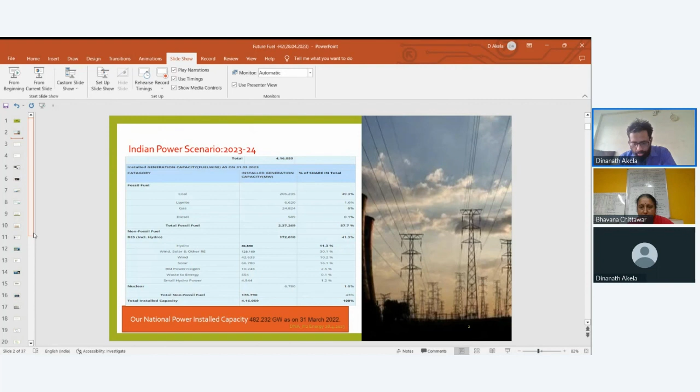So what I want to conclude is that if we look forward to the next decade, meaning 2023 to 2033, right now is the best time that renewable energies are going to take the lead.

This is the same situation as when I compare to 2009, when I was in engineering college and solar had just taken birth. At that time many industries and stakeholders were saying it's not going to be an alternate solution to thermal, because the unit cost of solar was 13 rupees plus. But now, after just 10 to 12 years, solar is very much competitive with coal.

This is in consideration of pricing, but in some other factors the cost of coal also goes high. In the same way, right now we are in the phase where hydrogen is just starting to take birth.

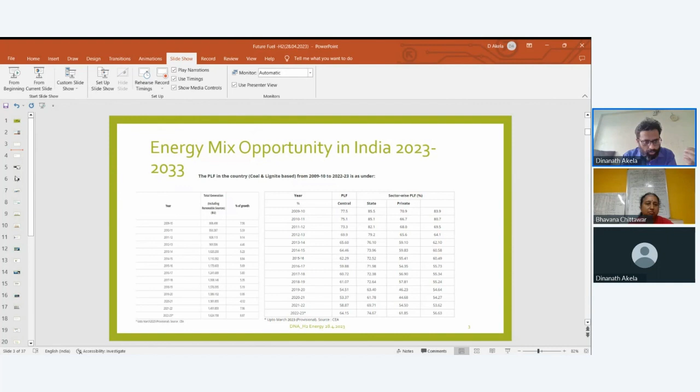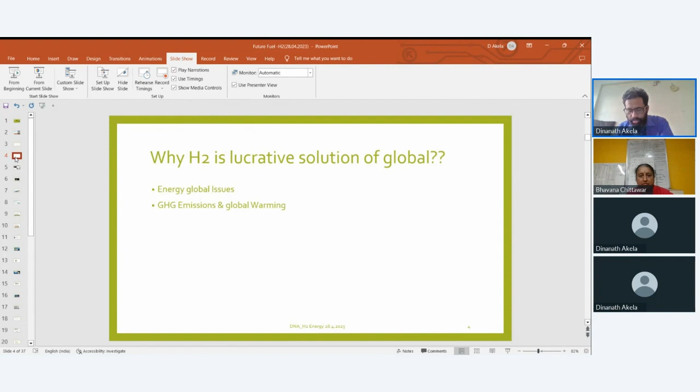This is the right time where many industries are giving more and more emphasis on R&D. They are setting up their own labs, facilitating things, investing, and coming up with great solutions. Let me share one or two examples in this regard.

First, I would like to tell you about Reliance. Their respected MD Mukesh sir has talked about a target called 1-1-1, which is very interesting: 1 kg of hydrogen would cost $1 within 1 decade. That is the target he has put forward.

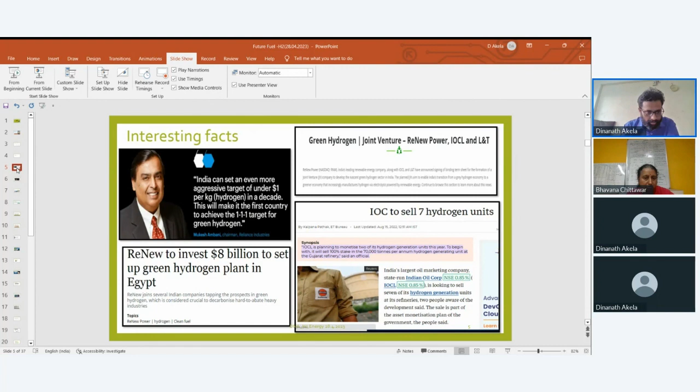Apart from that, other ventures like ReNew Power and IOCL are also going to make great investments in the field of hydrogen energy. We also have an update that Germany has started some hydrogen fuel train trials. I want to share a small video with you showing how our country is moving in the direction of Atmanirbhar Bharat.

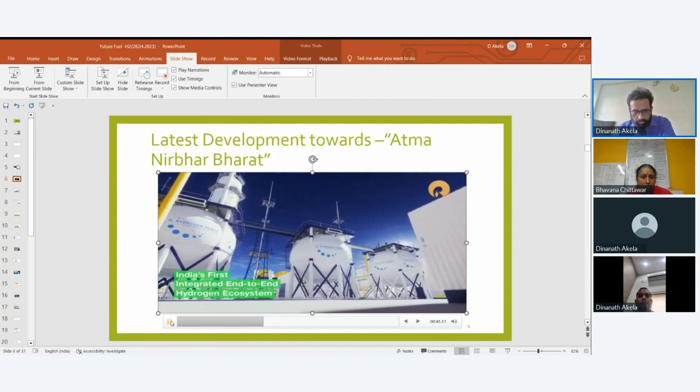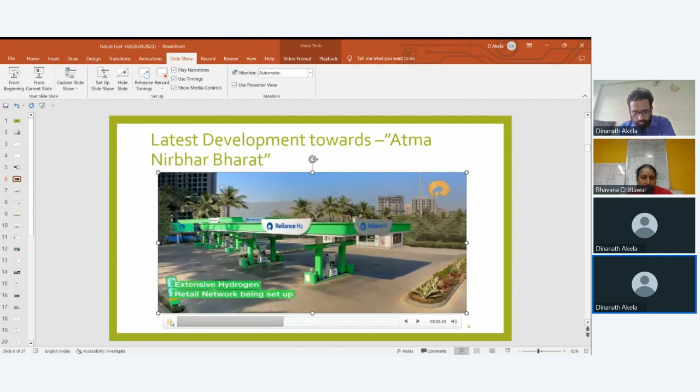Is there sound with this file? Yeah, is there sound with this file? Because we are not able to hear anything.

Apart from Reliance, some others just right now this week, Tata has also started a very big assessment of hydrogen gas firing in the blast furnace in Jamshedpur. So this is the right time that many industries are going to lead in the perspective of how they are producing, and they are going to change the technology in their periphery, in their system.

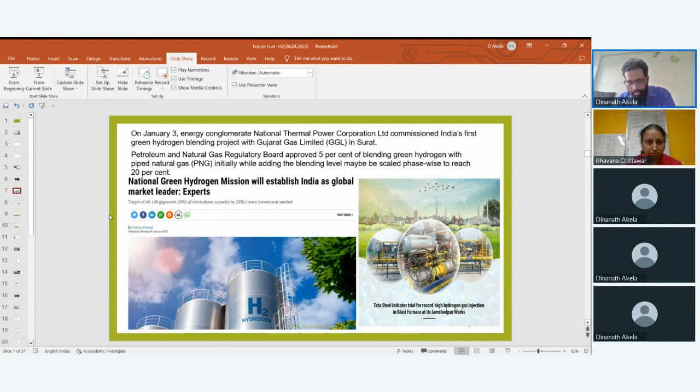Some more examples just right now I'm going to share: Gujarat Gas Limited in Surat, they are right now doing the blending of hydrogen with natural gases. So this is the right time, and we are hoping that definitely our country will lead in this platform.

But it is not easy. There are so many challenges right now we have to face, the technology development, and some factors I'm going to share from now onwards about how this firing technology is going to be built up, as we talk about the system of the furnace, as we talk about the system of the boiler. So each thing I'm just going to explain in detail.

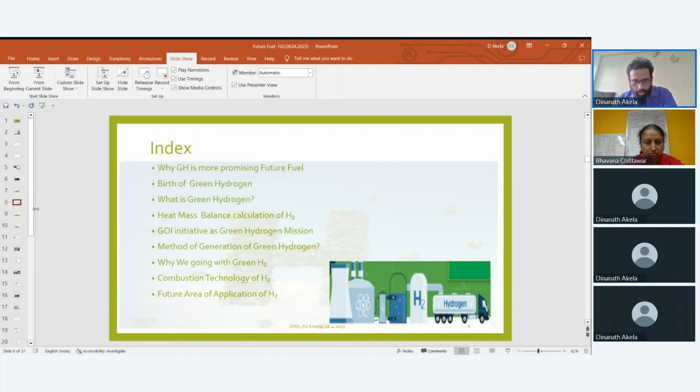First of all, I will give you the characteristics of hydrogen. It has a huge GCV value, like 28,922 kilocalorie per kg. If we compare with natural gas, then clearly we are getting more than 2.5 times.

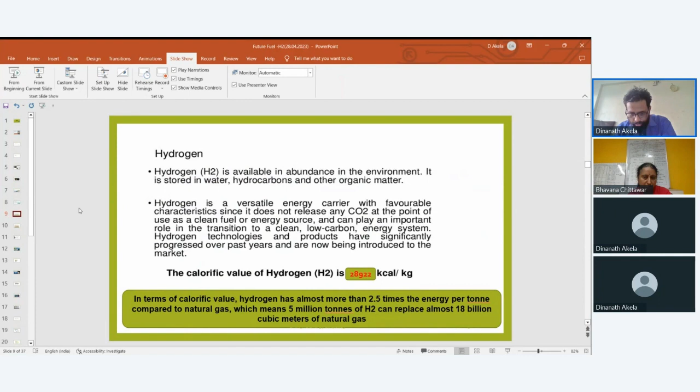Apart from that, some other factors I would like to show you: if we are just burning carbon, 1 kg of carbon gives a heat value of 8,084 kilocalorie. In the same way, if I burn hydrogen, it gives almost more than 2.5 times. So in this way, this is the comparison based on heat value.

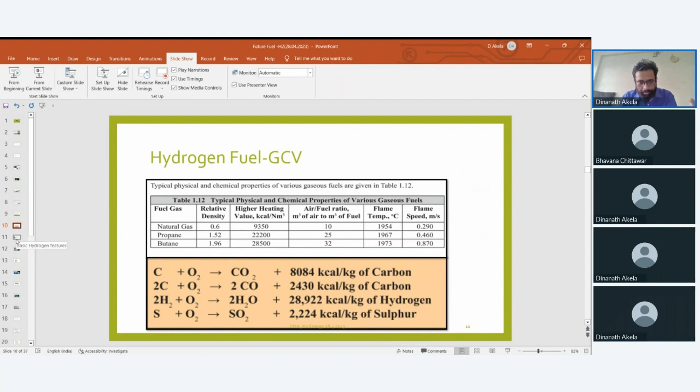If we see the other opportunity that hydrogen gives, the first and foremost is about emission. This is a very alarming time for us, because right now we are in a situation where we can say we all are sitting on a fireball. So this is the best time that we have to think not only about development but how we can save our earth for the future. In this way, hydrogen fuel has the potential to solve both issues.

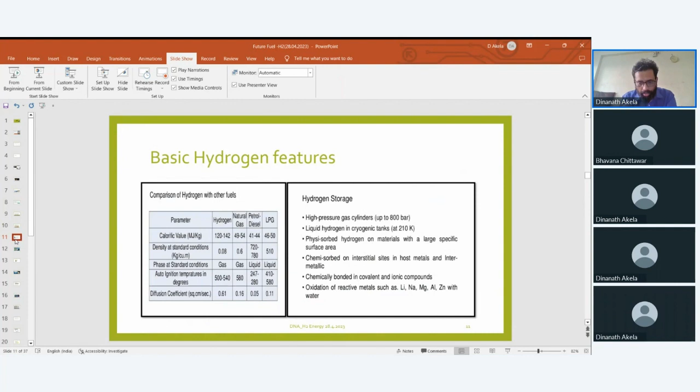So let me give you more detail about hydrogen features. It is going to be stored at very high pressure, so this is one challenge for us. The reactivity is very fast, and it oxidizes with metals like lithium, sodium, magnesium, aluminum, zinc, and water. According to that, we have to make the storage system so that we can easily transport it. Due to this reason, right now we are not in a position to transfer it in bulk. That's why what we are right now doing is just handling it in small buckets.

Why is hydrogen having such a promising future as a fuel? This is what we can say is the solution for energy and environment both.

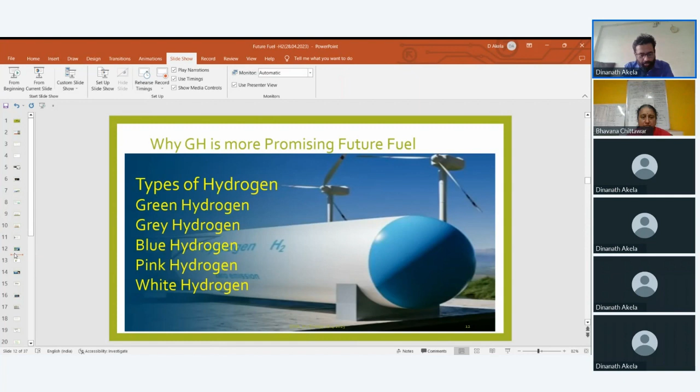According to the types of hydrogen, it is green, gray, blue, pink and white, depending upon the generation method. If we talk about green hydrogen, that we generate through renewable energies or renewable electricity.

So once again, let me put how the methods of producing hydrogen gases come up. The first thing is steam methane reforming, after that partial oxidation, autothermal reforming, methanol reforming, pyrolysis, oxidation, reduction of biomass, electrolysis method for water. This is the best method, and in the globe, lots of research and work is going on. After that, we also have fermentation of organic material, and thermochemical splitting of water.

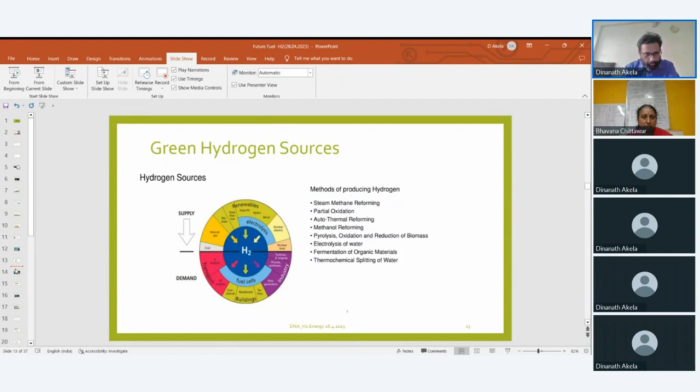So this is the process that is called the electrolysis method. But here the process and the challenge to get this hydrogen gas is very tough, right? And the production rate of hydrogen is still on the lower side.

So right now more and more development is going on in terms of what type of catalyst we can use. Some research is also going on using cadmium or other materials as electrodes, so that it is easier, safer and faster generation of hydrogen. So this is what we can say is the phase of the prototype. After the success of this prototype, then industry can scale up to a large scale. So this is the small thing.

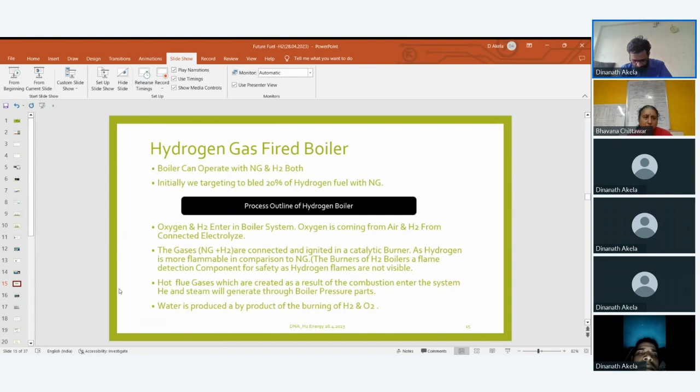When there is a leakage, there are chances of explosion. So we have a high quality detection system that I will explain in the next few slides. This is the pathway and scheme where, with the help of good accuracy instruments, we can fire hydrogen burners in the boiler.

And if it is not going or in idle time, we also have a purging system, and this purging system is completed through nitrogen. By this method, up till now, we can achieve in a practical way 20 to 25% by volume, or in normal meter cube, 300 to 400 normal meter cube per hour, with a pressure of 21 to 25 mm WC.

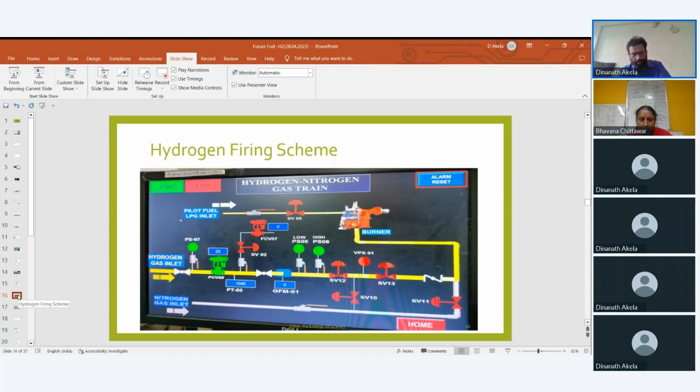So here I have mentioned the SOPs of hydrogen firing in the boiler up to 40%, but we have achieved 20-25%. You can see here the hydrogen gas pressures - we have safety limits and safety alarms for safer operation and reliable use of hydrogen in the boiler. High pressure tripping will be at 2500 mm WC. On the lower side it is 100, and the gas leak alarm will be generated at 400 mm WC. With these facilities we are moving forward.

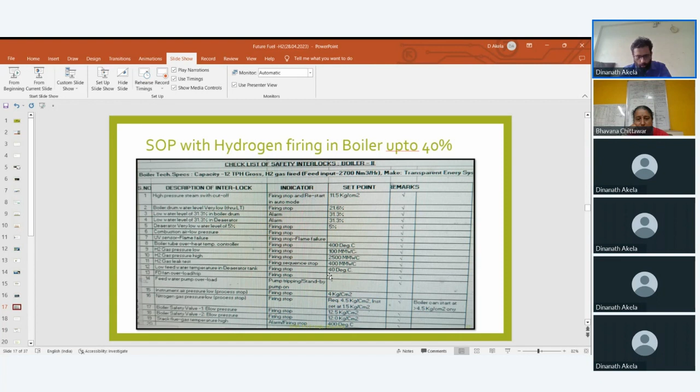Now what are the challenges of hydrogen firing, as we are looking at the design? The first challenge we are facing is that hydrogen has a laminar flame speed which is higher compared to other hydrocarbons, as I already explained. So what does this mean?

It means that compared to other hydrocarbons, per unit volume or per unit area, the heat given by hydrogen is much higher. The point is that if we fire with hydrogen, we get a high amount of adiabatic temperature, and this temperature will be more than 1100 degrees Celsius.

So what happens above 1050 or 1100 degrees Celsius is that NOx generation starts. And here what we have observed is that as we are firing with hydrogen, the NOx generation is approximately 3 times higher compared to hydrocarbon.

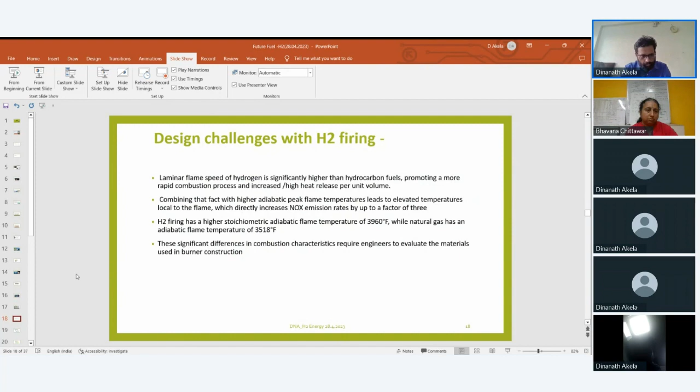Now I have shown one process outline for the hydrogen boiler. We get the hydrogen through the electrolyzer, and after that we put it in the combustion chamber. Then it goes through the process of combustion, and heat is generated, and this heat is utilized for steam generation. So this is the basic scheme I have drawn for that.

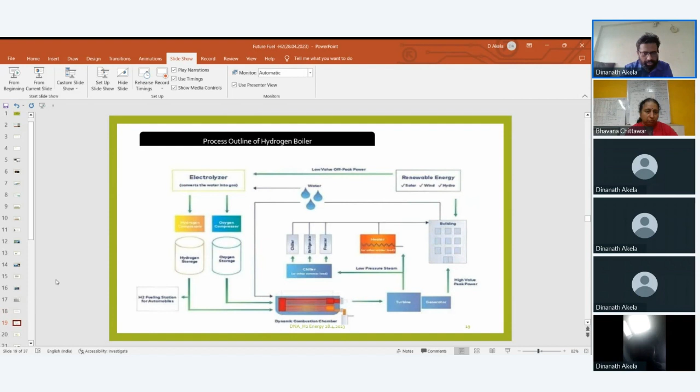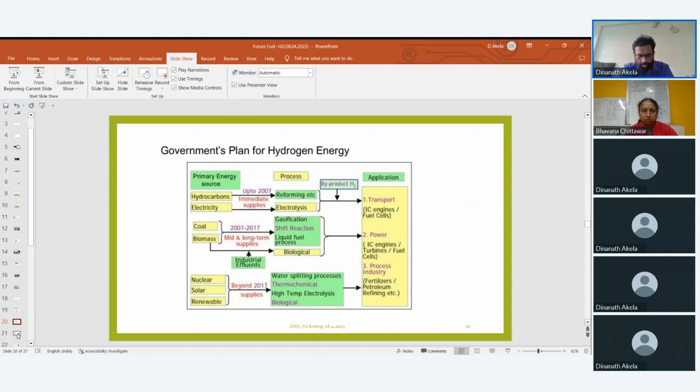Now the government is also giving much more emphasis, and they have started the Green Hydrogen Mission. So I will tell you about that initiative.

But before that, let me point out the safety concerns and safety interlock devices which will help detect 0.001% of hydrogen leak where we are using it in the boiler or furnace area. I have mentioned two instruments that have the highest accuracy of leak detection: TDL systems and flame scanners with ultraviolet or infrared detection, which may no longer be suitable for that.

Because instruments that work on UV and IR have some limitations, if we go to detect hydrogen, we have to move a little bit to other sensing devices to accurately and quickly give the result. According to that, we can prepare our SOP to stop the firing, and based on the results, we have to purge and clean the system.

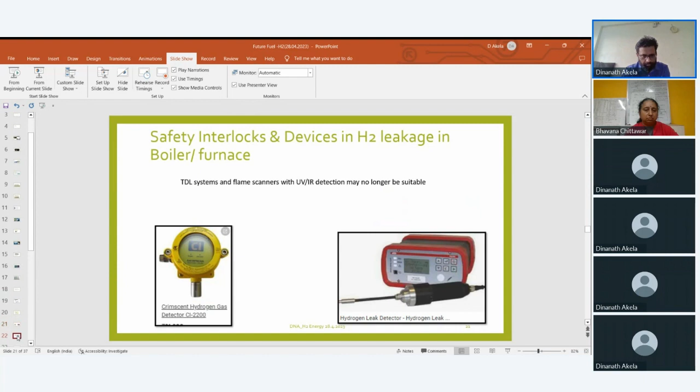Another challenge is how we are going to modulate the firing of hydrogen in the boiler. Other challenges are associated with green hydrogen itself - the formation through electrolysis method or steam reforming, the two main processes of hydrogen extraction, are extremely expensive right now.

So in a few slides, I will talk to you about the costing right now, because you definitely have this question in mind: what is the current cost of production per kg of hydrogen? So I will share that with you.

Apart from that, storage is one big challenge, because you have to store it at very high pressure. Compared to gas, hydrogen leaks are almost impossible to detect by smell, so that's why we have to use very high accuracy equipment so that when some leakages occur, we can easily trace, check, and isolate them.

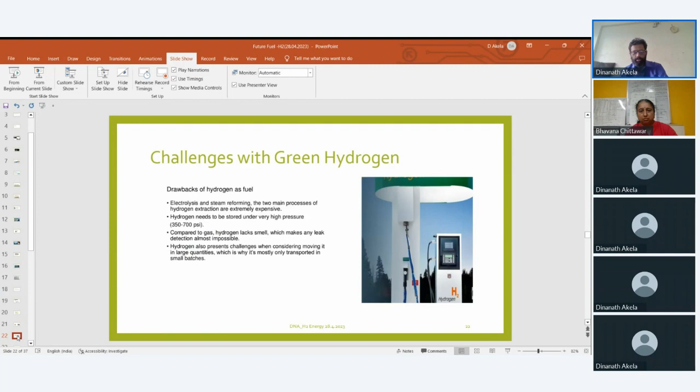Hydrogen also presents a challenge when considering moving large quantities, as I told you. That's why right now we are transporting it in small batches. As a drawback of hydrogen as a fuel, the main important thing is about the existing infrastructure - it is also required to deal with the same.

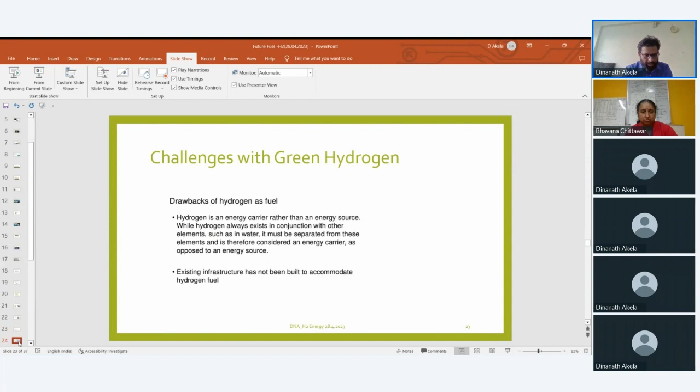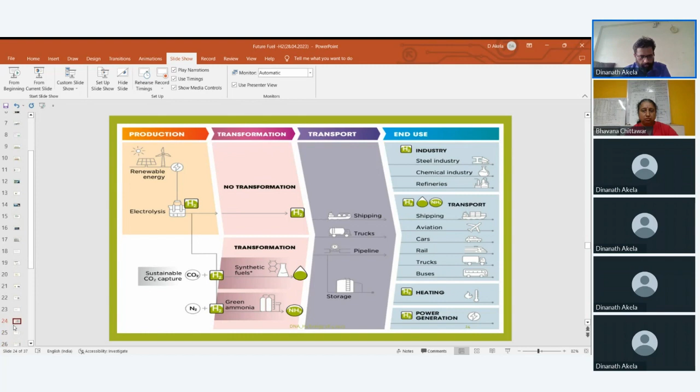Now this is important about the purity of hydrogen, because suppose there is a minor 0.01% leak, impurities, or moisture present - there are chances of a huge explosion taking place. So that's why we regularly have to take samples, regularly monitor the system, and place dedicated monitoring systems in the closed system, so that any radiation or leakages can be easily traced and made safe.

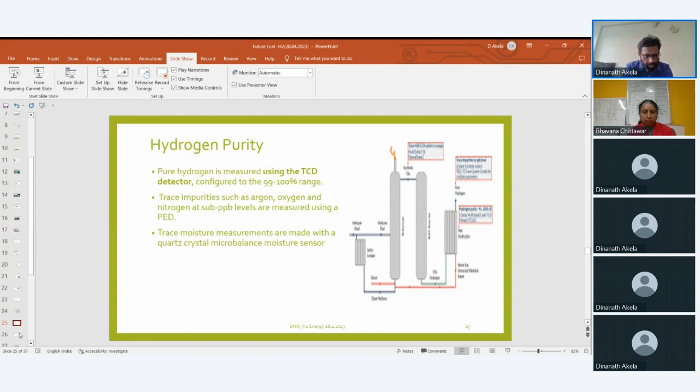Now let me talk to you regarding the cost of hydrogen generation. In 2010, the cost of hydrogen per megawatt of generation was 600 US dollars, or per kg of hydrogen, the cost was 24 dollars. Right now we have a cost of around 10 to 12 dollars per kg, which we have to target reducing over the next decade to a larger scale of 1.5 to 2 dollars. So this is the current cost of production of hydrogen.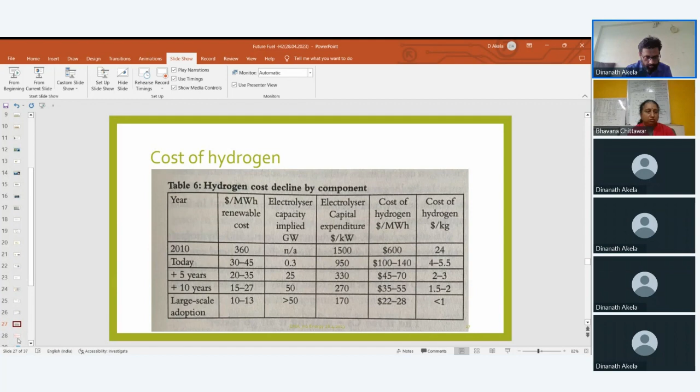The government of India also has great missions to promote and sustain more development in the field of green hydrogen missions, and they have published and maintained policy for that. This policy is going to create favorable conditions to promote the uses and more development, and make it an energy hub in the green hydrogen field.

Let me discuss a few clauses: for manufacturing of green hydrogen or ammonia, the renewable energy plant shall be given connectivity to the grid on a priority basis to avoid any procedural delays - that provision has been made. Apart from that, some relaxation is also given in the format of taxation and benefit of Renewable Purchase Obligation (RPO), which will grant incentive to the hydrogen and green hydrogen manufacturer and distribution licensing for consumption of green power. These are some steps going on, with much more detailed pathways mentioned by the government of India to promote this green hydrogen mission.

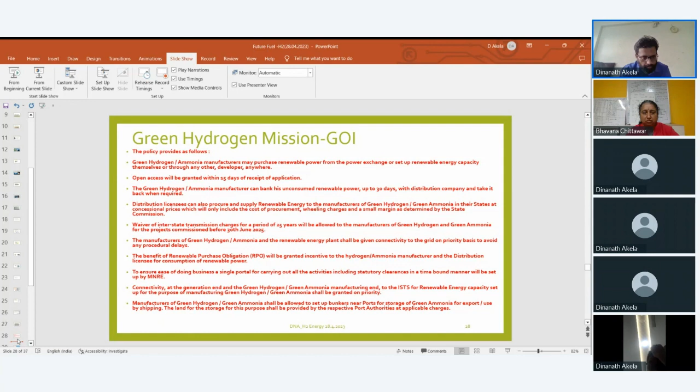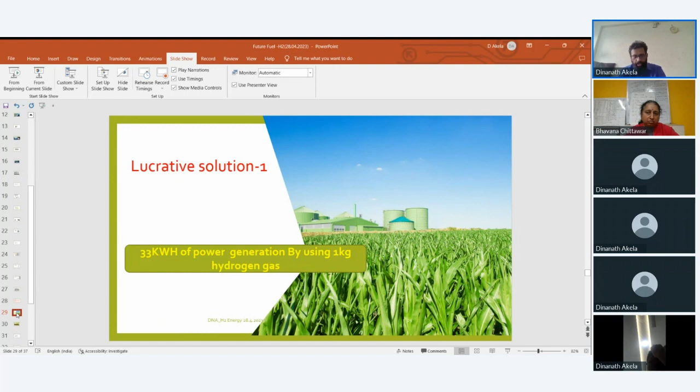Now this is one important thing - very important - what are the lucrative solutions when using green hydrogen or hydrogen gas. Simply put, if we use 1 kg of green hydrogen or hydrogen gas, we are able to generate 33 kilowatt hours. In simple way, by 1 kg of hydrogen gas, we can generate 33 units. So this is one important benefit and opportunity of using hydrogen gas.

The second point, as I started with the theme of this webinar, is about energy security or energy mix. Energy security is going to be provided through steps of more and more use of hydrogen energy, so that the load on thermal and other sources is diminished. R by P is reserve versus production - for coal right now it's estimated availability for the next 35 to 40 years. That's why I'm emphasizing that we are at the bottom of the corner, or at the edge of the corner. So we have to take the initiative and run fast, not only for the uses of electricity generation but also for our future. It's also going to provide energy security for Atmanirbhar Bharat.

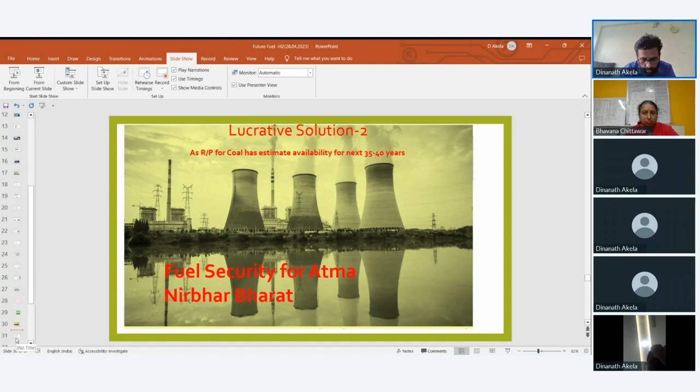More detail I want to share regarding the development of hydrogen energy in India. Research at different labs is going on. In some places they are working on the method of electrolysis, and elsewhere they are working on how to increase the rate of production. So all these developments are still in their phases.

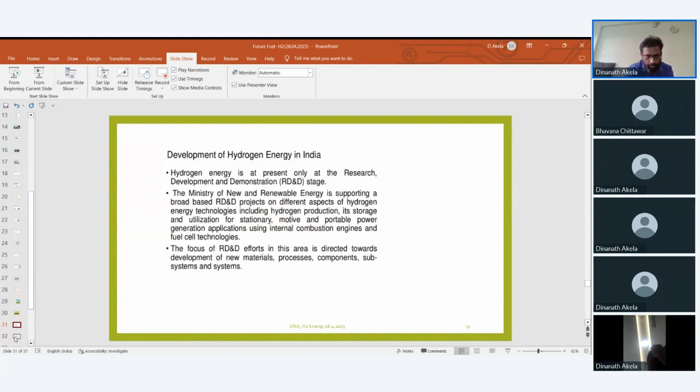Labs like CIMFR Dhanbad, BHU, Mahindra and Mahindra, IIT Kharagpur, and research work for hydrogen storage in carbon material at IIT Madras, Chennai is also going on.

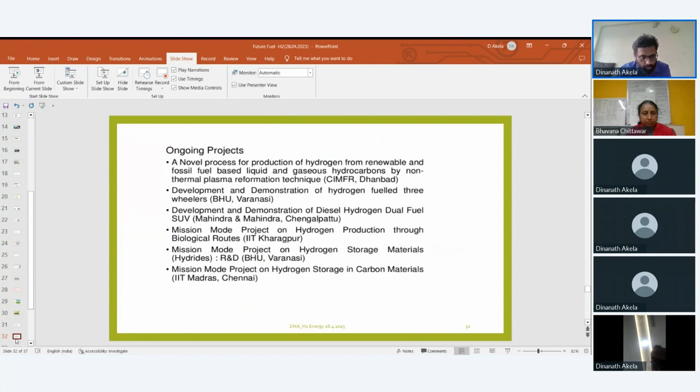So now we reach the conclusion that hydrogen storage is still the major issue of concern. Lots of work is still in process. Development, usage, and reliability are all still in the pipeline. So hopefully in the coming time we will get the latest developments of uses of hydrogen in the future.

Definitely sir, at some point I agree with you. But regarding the firing concern as you mentioned, since hydrogen is absence of carbon, the combustion is going to take place differently.